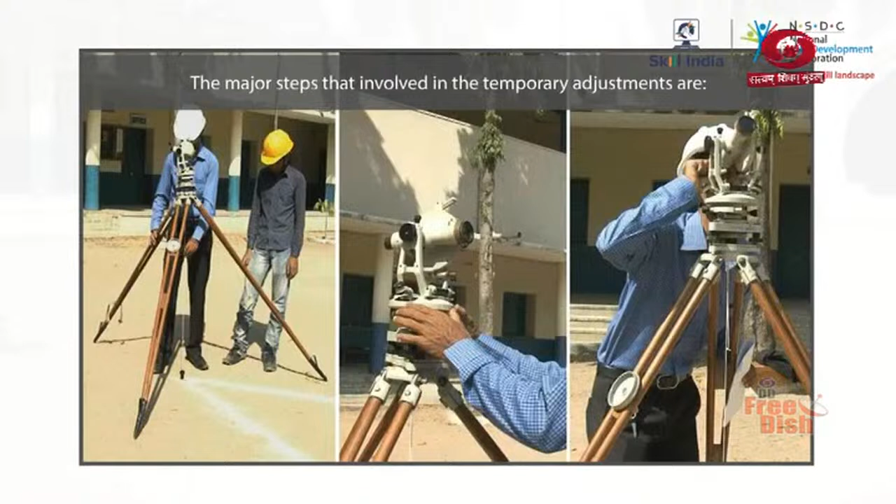Such as setting up the theodolite and centering, leveling the instrument, and elimination of parallax.

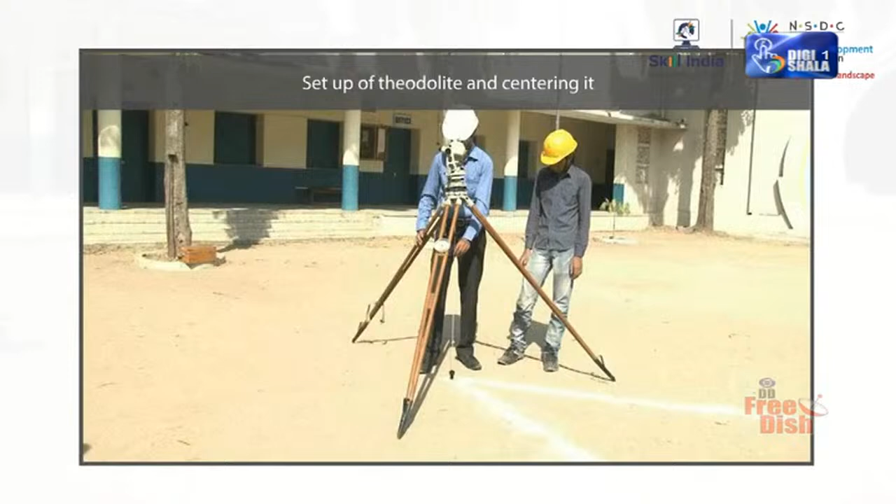Setting up and centering the theodolite means positioning the instrument exactly above the station mark. Leveling the instrument means adjusting it to an exactly vertical position. Eliminating the parallax means focusing the telescope sharply by turning the eyepiece and the focusing screw.

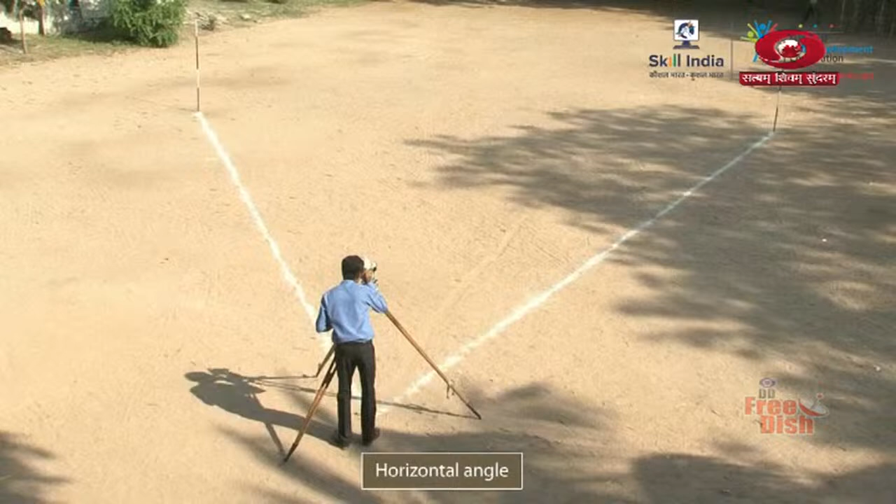A horizontal angle is an angle measured in the horizontal plane in the clockwise direction. To measure the horizontal angle with a theodolite, you must follow a few steps while handling its parts, such as the vernier on the upper plate, the lower plate, the telescope, and others. Let us find out what these steps are.

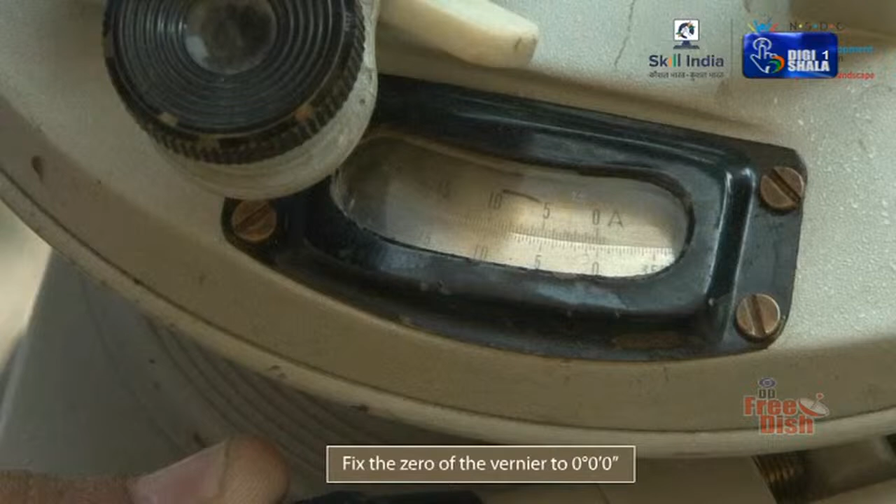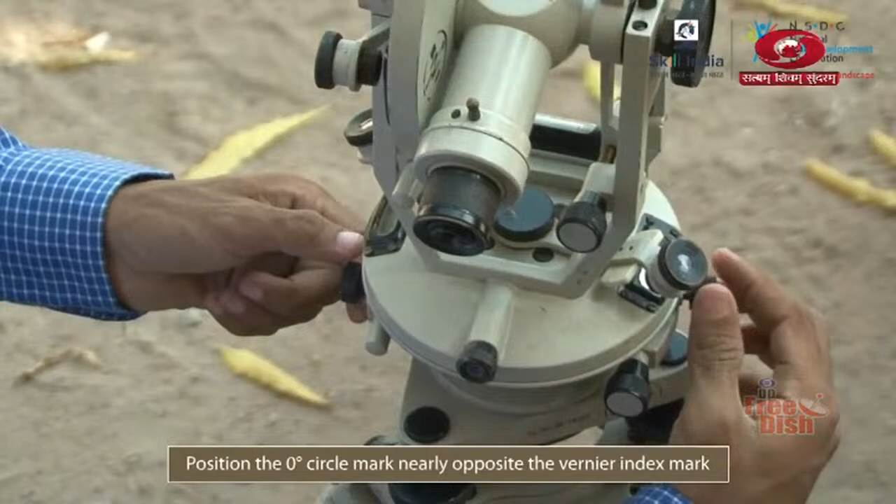To measure the horizontal angle, you must first fix the zero of the vernier in the upper plate to 0 degrees, 0 minutes, and 0 seconds of the circular scale of the lower plate. To do this, first, loosen the upper and lower clamps and position the 0 degree circle mark nearly opposite the vernier index mark.

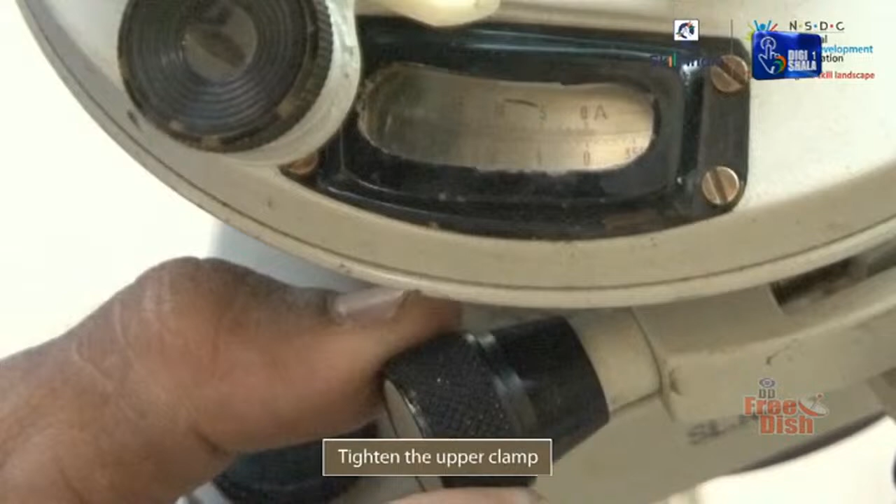Then, tighten the upper clamp. After that, use the upper tangent screw to position the 0 mark of the circle so that it is accurately aligned with the vernier index. When you tighten the upper clamp, the circle and the upper plate must be locked together and rotating as one.

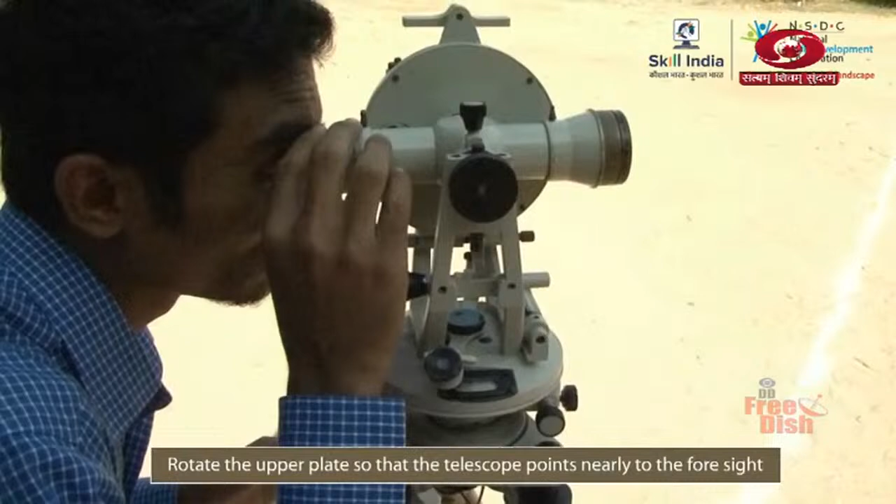Next, keeping the lower clamp loose, point the telescope to the back sight and take the vernier readings. Keeping the upper clamp loose, rotate the upper plate so that the telescope points nearly to the foresight. After that, tighten the upper clamp and focus the foresight precisely.

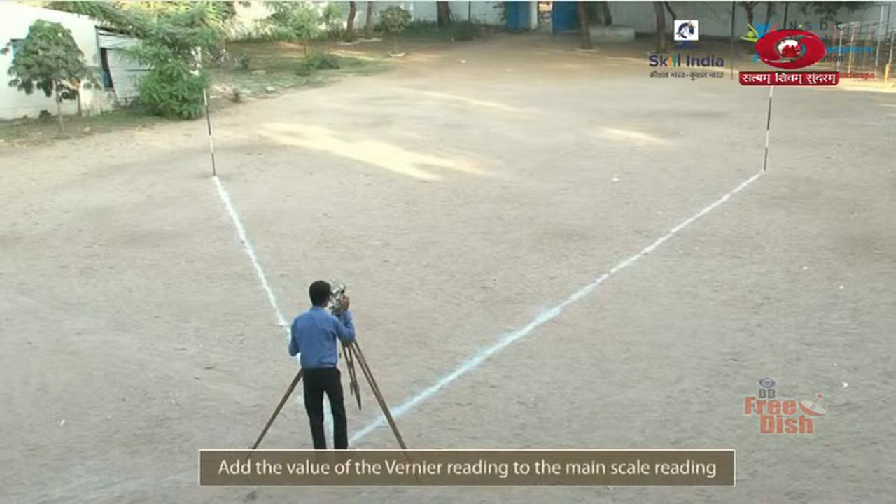Finally, add the value of the vernier reading to the main scale reading. The sum is the value of the horizontal angle. So remember, these are the steps that you must follow for taking the measurement of a horizontal angle using the theodolite.

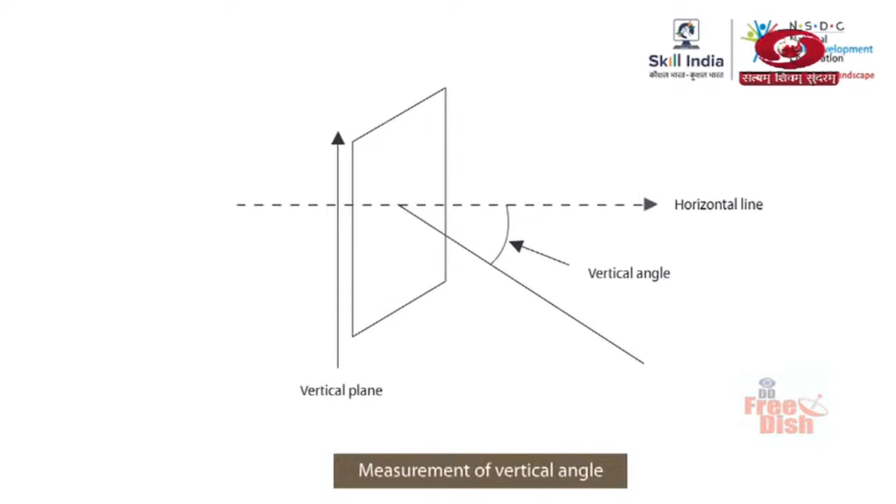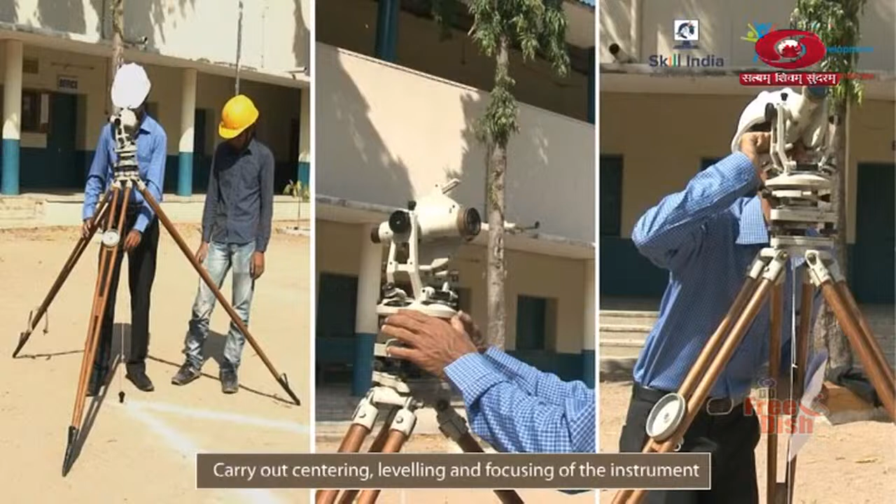A vertical angle is the angle measured upward or downward in the vertical plane from a certain point on a given horizontal line. To measure the vertical angle with the theodolite, you must follow a few steps. Let us find out what they are. First, carry out the steps for centering, leveling, and focusing the instrument.

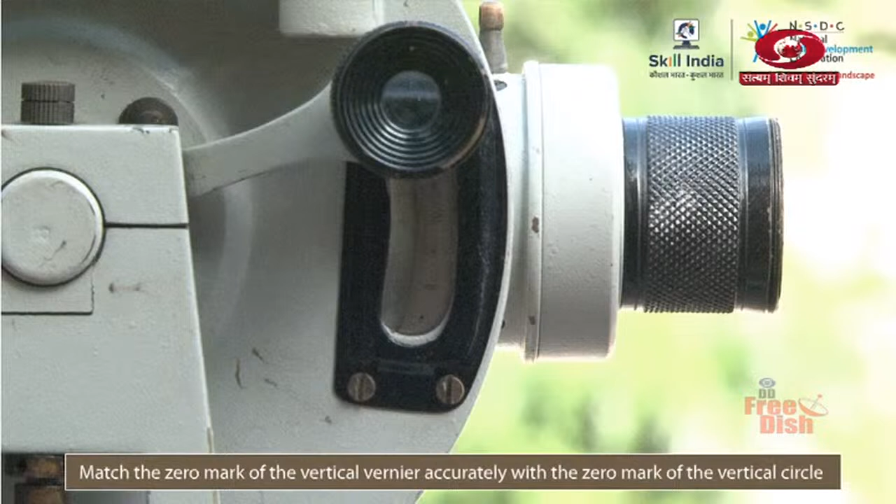Next, with the help of the vertical circle clamp and the tangent screw, match the 0 mark of the vertical vernier accurately with the 0 mark of the vertical circle. Once the bubble is leveled, loosen the vertical circle clamp and point the telescope to the object O, whose vertical angle you have to find. Then, tighten the upper and lower screws.

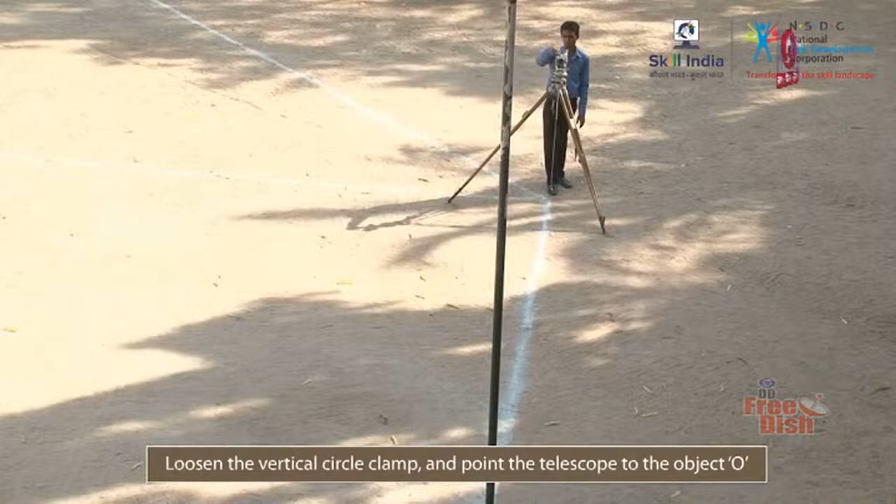Point the telescope to the bottom of O, fix the vertical circle clamp, and take reading of both the verniers. Change the face of the theodolite and take a second reading of both the verniers.

Finally, obtain the measurement of the vertical angle by making a note of the mean of the left and right face readings. So remember, these are the steps that you must follow for taking the measurement of a vertical angle using the theodolite.

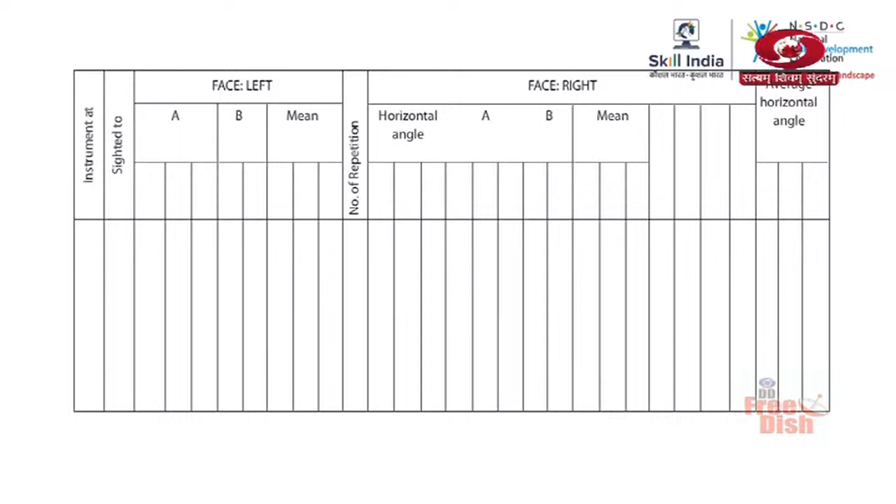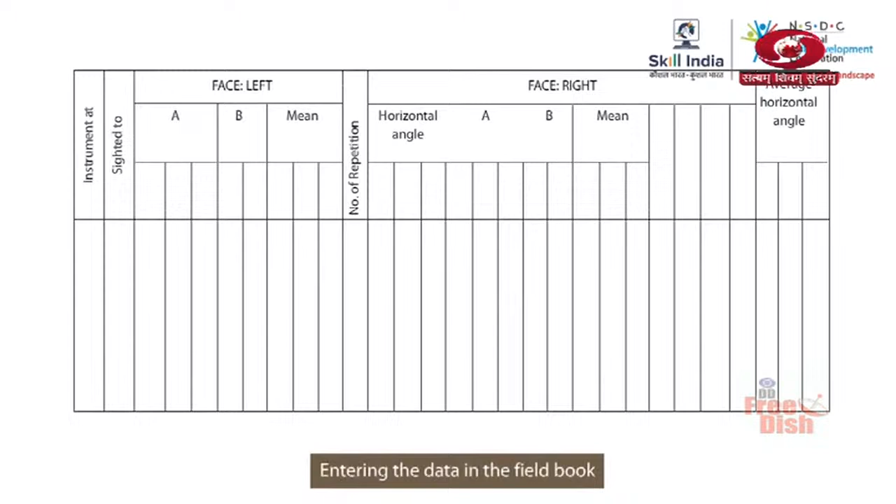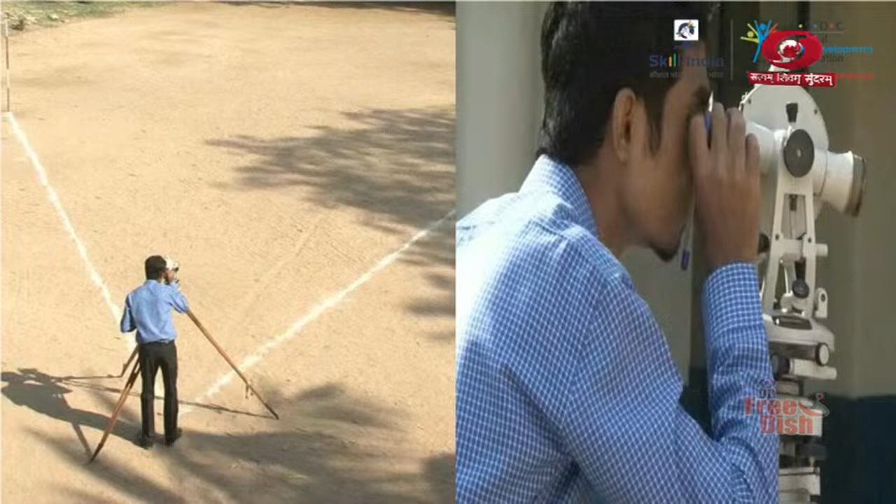In this module, you have learned to explain the measurement of horizontal and vertical angles and the adjustment of vernier scale and enter the data in the field book. You can measure the horizontal angle by following some steps while handling parts of the theodolite, such as the vernier on the upper plate, the lower plate, the telescope, and others. You can measure the vertical angle by following some steps while handling parts of the theodolite, such as the plate bubble, foot screws, telescope, and others. You can follow these formats for entering the data in the field book.

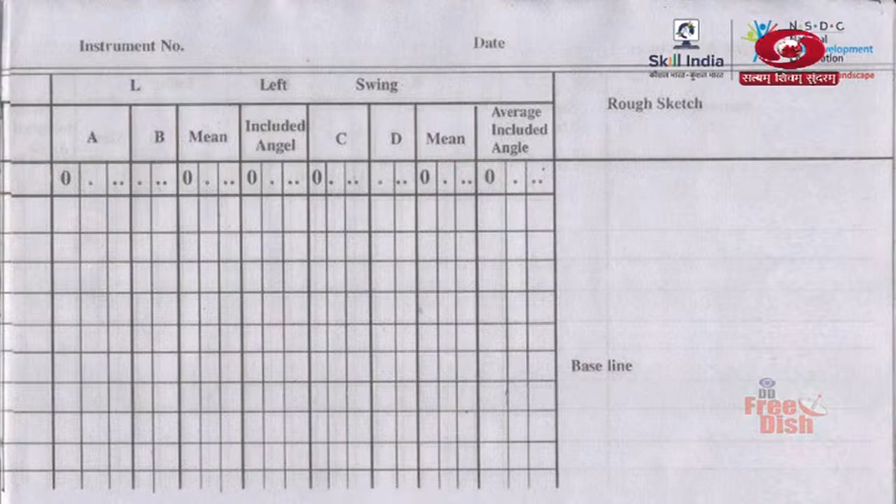You have seen how to make measurement of horizontal angles directly using the theodolite. Sometimes, though, you need to take a measurement of the horizontal angle along with very precise subdivision values of the angle. Also, you might have to take different horizontal angles from one and the same station. How can you do this? Let's find out the answer by going through this module, Measurement of Horizontal Angle.

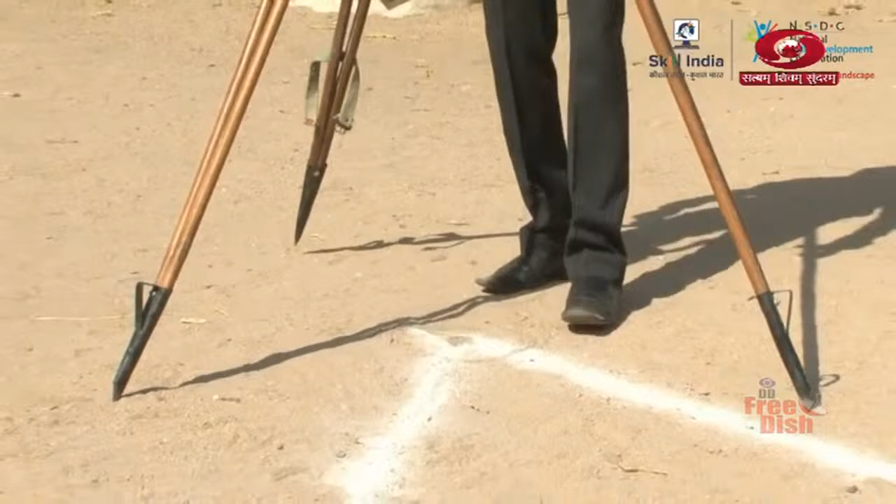And sight the primary point of the horizontal angle. Then, turn the upper fixing screw and the upper tangent screw to match the 0-0 mark of the vernier with the corresponding mark of the main scale.

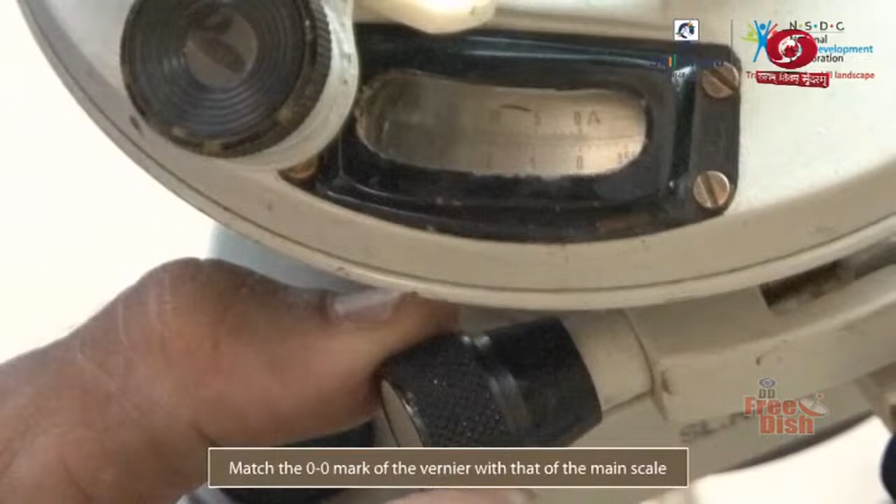Next, turn the lower screw loose to rotate the two plates as one to the secondary point of the horizontal angle. Keeping the lower clamp fixed, turn the upper fixing screw loose. Check the reading on the instrument and record the value.

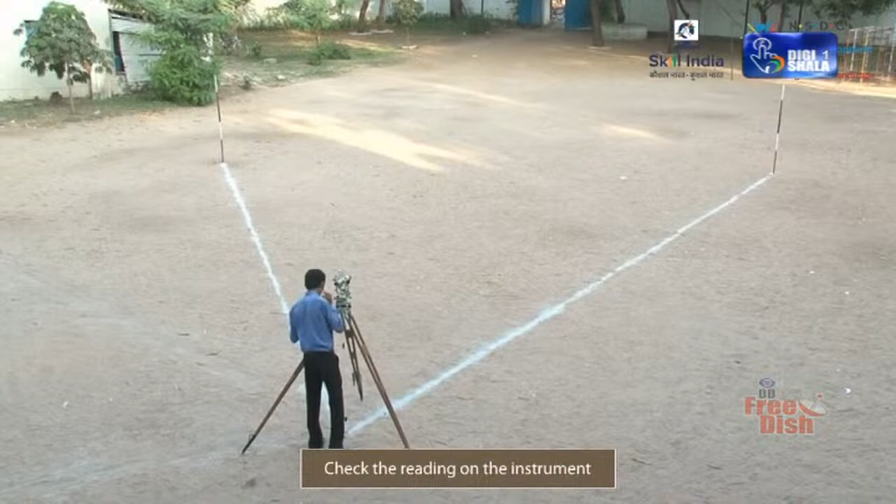Now you must begin the steps of repetition by changing the position of the telescope. So, loosen the lower clamp and transit the telescope. Keeping the angular reading fixed at the initial value, rotate the plate unit and point to backside. Turn the lower clamping screw tight. Then, use the lower tangent screw to point accurately to the backside.

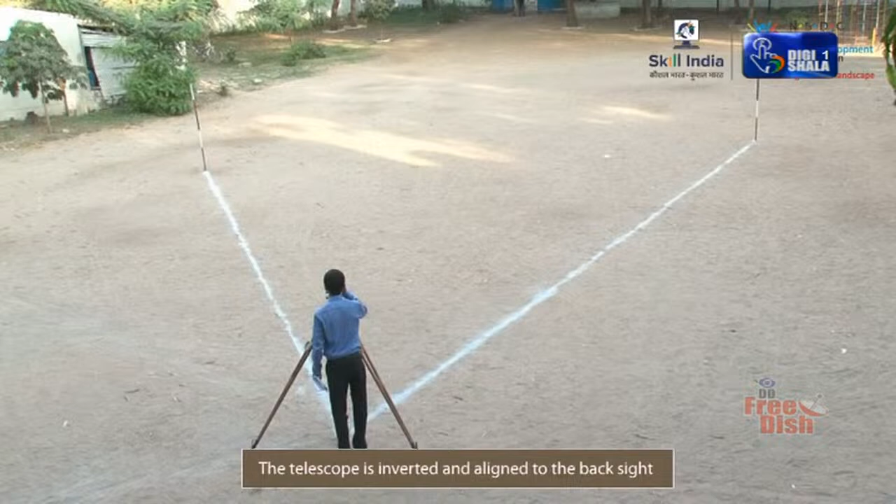Note that the telescope is inverted and aligned to the back sight. As you can see, the initial angle reading remains set on the horizontal circle. Now, turn the upper clamp loose, rotate the upper plate and point at foresight. Finally, turn the upper clamp tight and use the upper tangent screw to complete foresight pointing.

The vernier reading shows the angular measurement as equal to the sum of the first and the second angle. Divide this sum by 2, that is, the number of repetitions, to find the average value of the angle. Note that you can get a precise reading of the angle by this method. So, remember, these are the steps in measuring the horizontal angle by the method of repetition.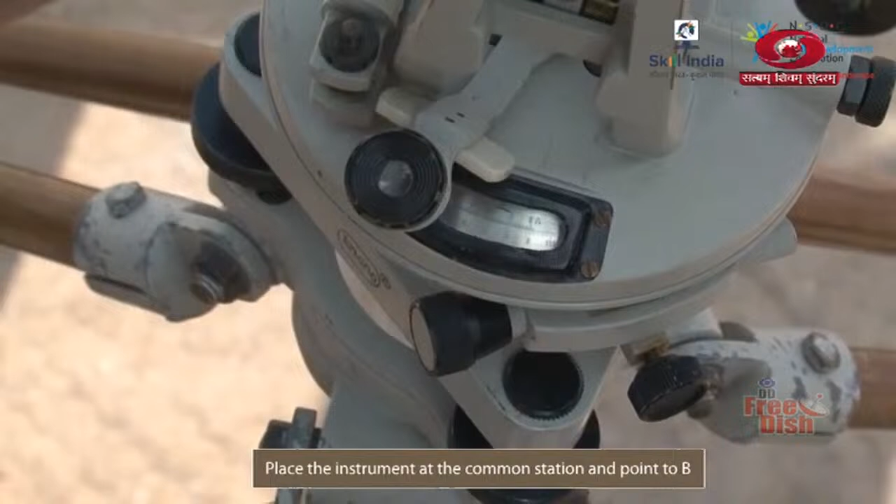The reiteration method for measurement of horizontal angle is followed when several horizontal angles must be measured from the same station. Let's take a look at the steps to be followed in this method. First, place the instrument at the common station and point to the first station B. Keeping the reading of one vernier as 0, 0, make a note of the reading of the other vernier.

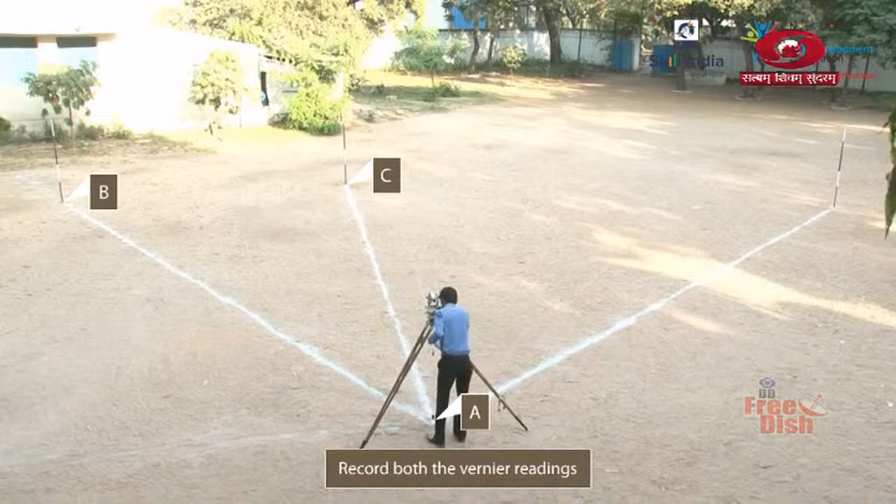Then, with the instrument in the face left position, turn the telescope clockwise to side C. Then, clamp the upper fixing screw and bring the crosshair into coincidence. Record both the vernier readings. Note that their mean gives you angle BAC.

Turn the upper clamping screw loose and rotate the instrument to D. Calculate the mean of the vernier readings again to obtain the angle BAD. Subtract angle BAC from angle BAD to get angle CAD. So, remember, this is the method to be followed for measurement of horizontal angle by reiteration method.

You have just seen how to measure horizontal angle by the repetition and reiteration methods. Now, let us take a quick look at how to enter the data in the field book. This is the field book format for entering data relating to the measurement of horizontal angle by repetition method.

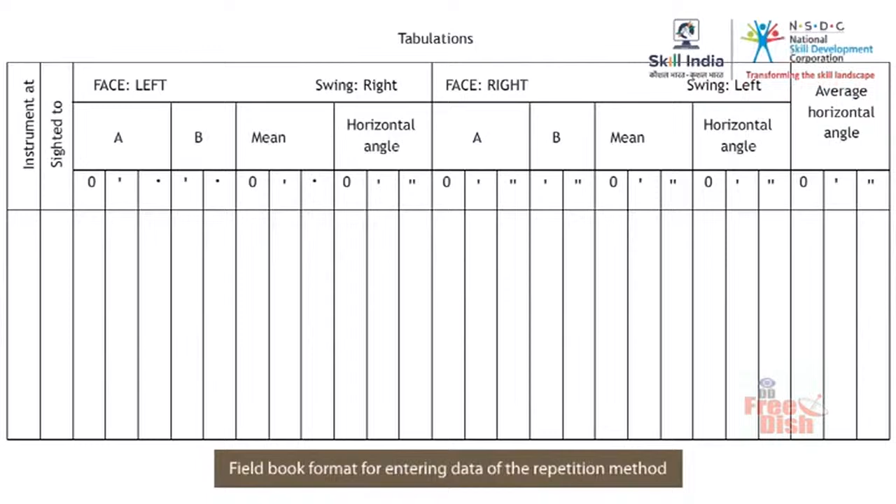And in this module, you have learnt to measure horizontal angles by the reiteration and repetition method and to enter data in the field book. These are the steps to measure the horizontal angle by the repetition method. These are the steps to measure the horizontal angle by the reiteration method. You can follow these formats for entering horizontal angle.

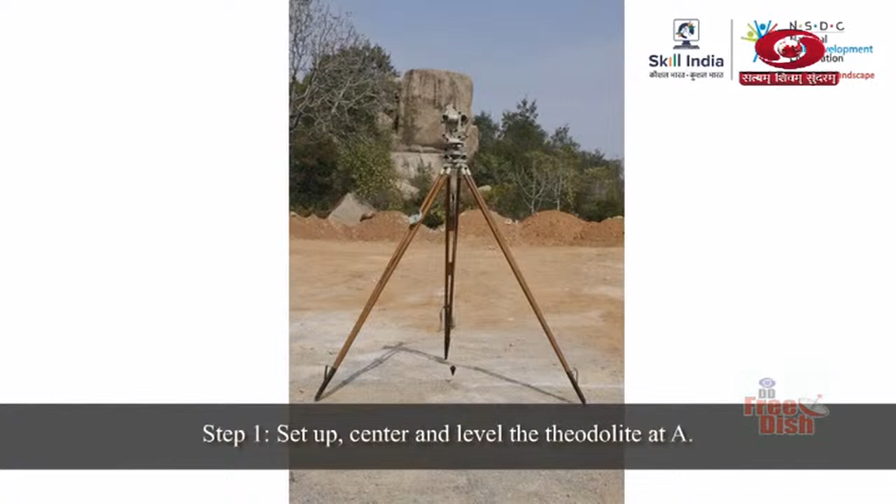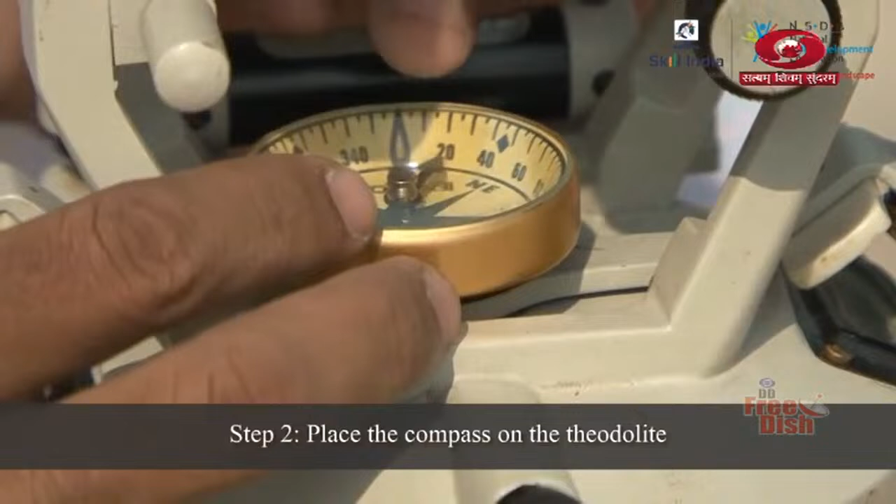To measure the magnetic bearing, first set up, center, and level the theodolite at A. Place the compass on the theodolite. Rotate the telescope by loosening the lower clamp until the needle coincides with 0, 0. It indicates that the telescope is perfectly oriented along the magnetic meridian.

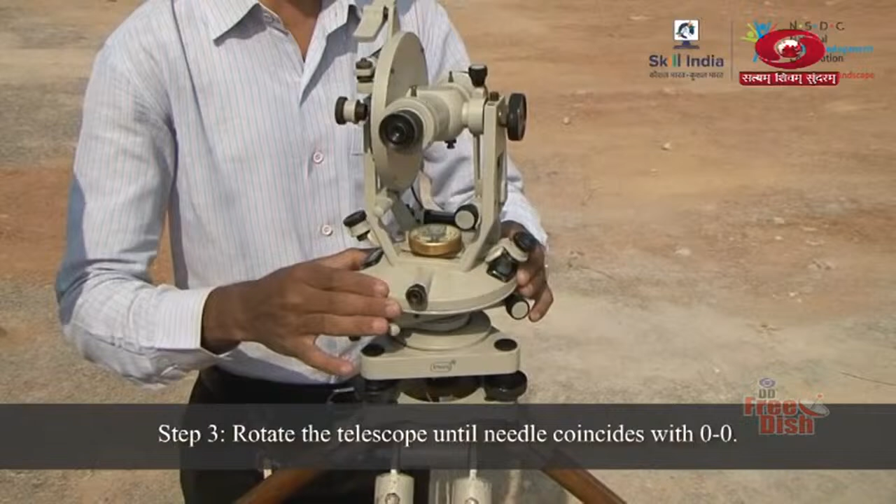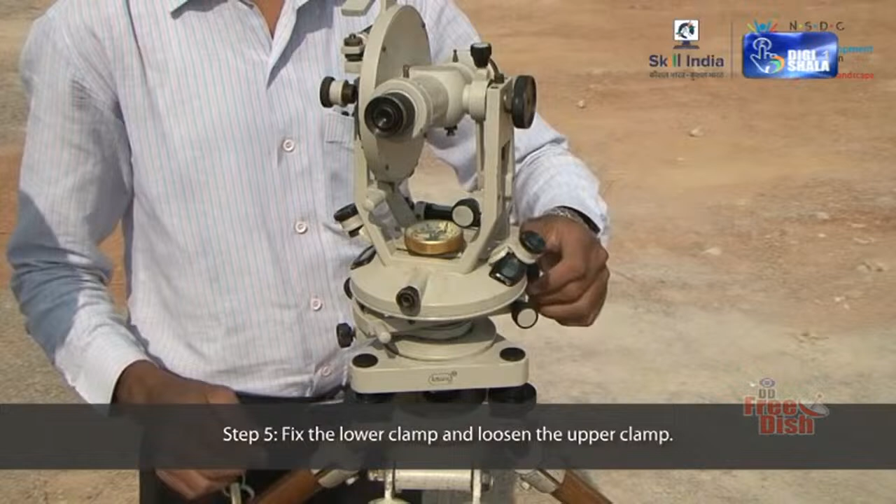Set the vernier at A and B to angles 0 and 180 degrees respectively. Fix the lower clamp and loosen the upper clamp. Turn the telescope clockwise to bisect the ranging rod at B with the help of an upper tangent screw. Take the readings from both the verniers.

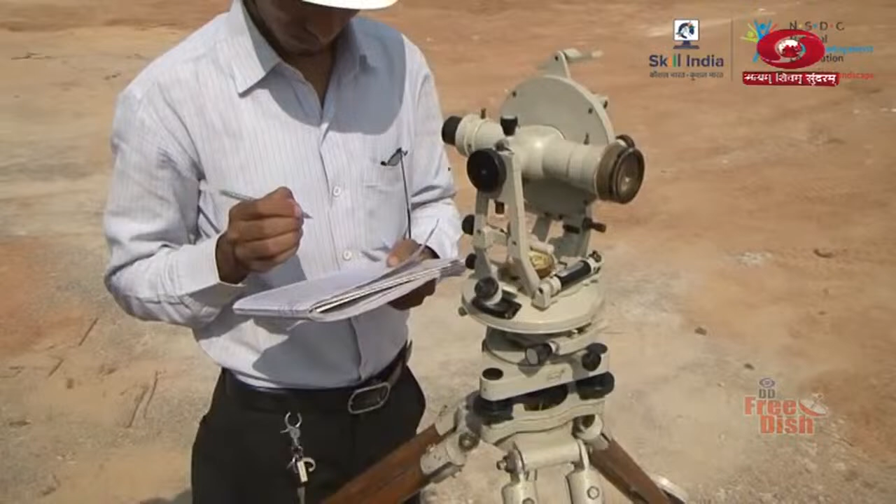Calculate the mean of the two vernier readings, which is known as the magnetic bearing of line AB. So remember, these are the steps you must follow in order to determine the magnetic bearing.

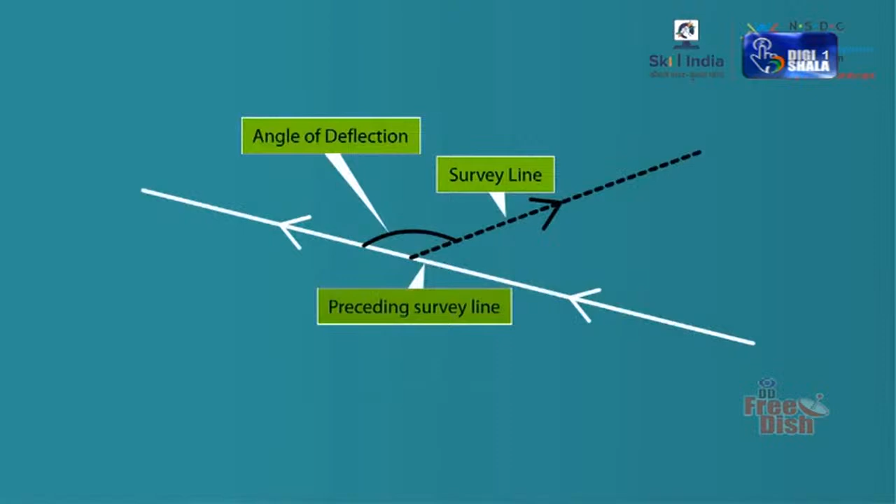Deflection angle refers to the angle by which a line is deflected from its original direction. In other words, it refers to the angle that a survey line makes with the extension of the preceding line. Deflection may be towards the right or left, depending upon the measurement of the angle in the clockwise or anti-clockwise direction from the extension of the preceding line.

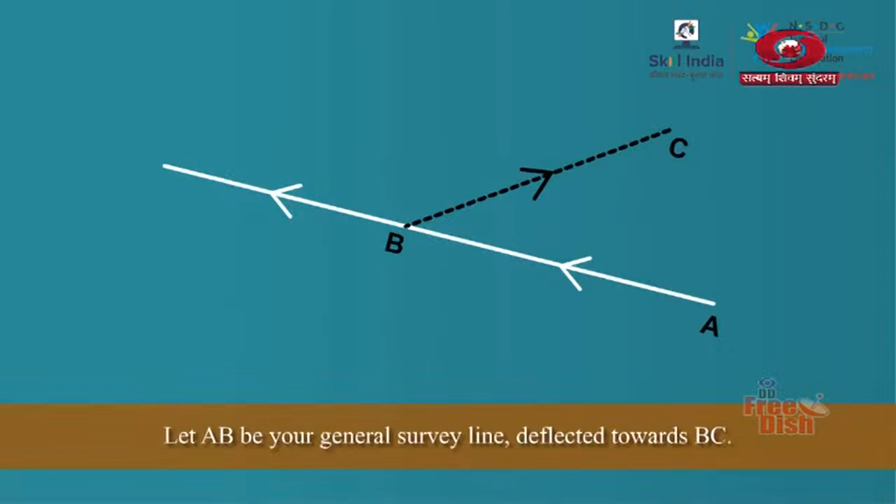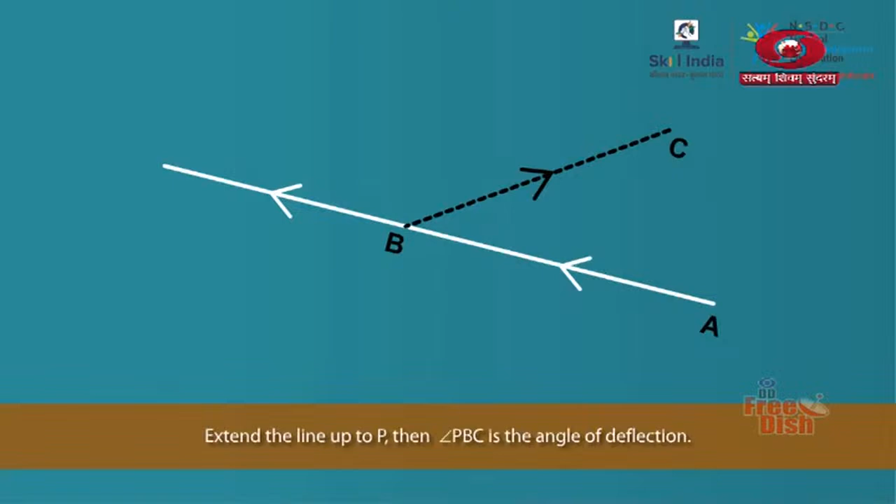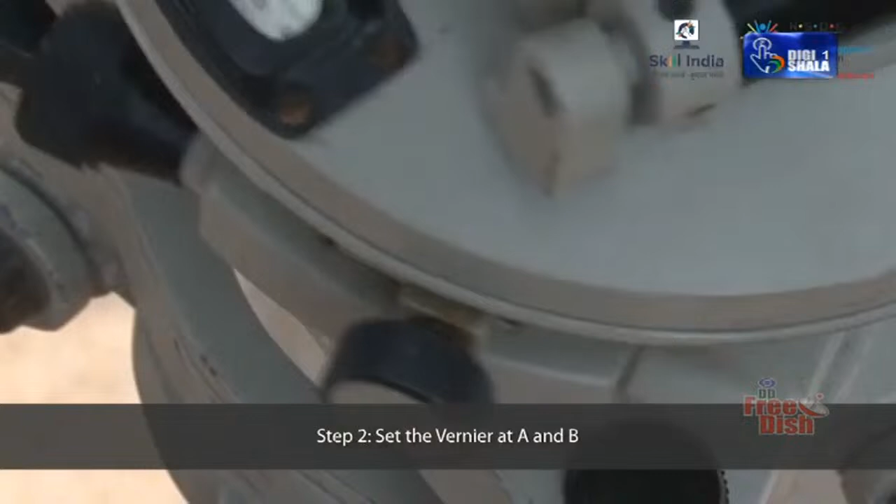Let us say AB is your general survey line, which is deflected towards BC. With AB extended up to P, the angle PBC is termed as angle of deflection. To measure the deflection angle, first set up, center, and level the theodolite at B. Set the vernier at A and B to angles 0 and 180 degrees respectively.

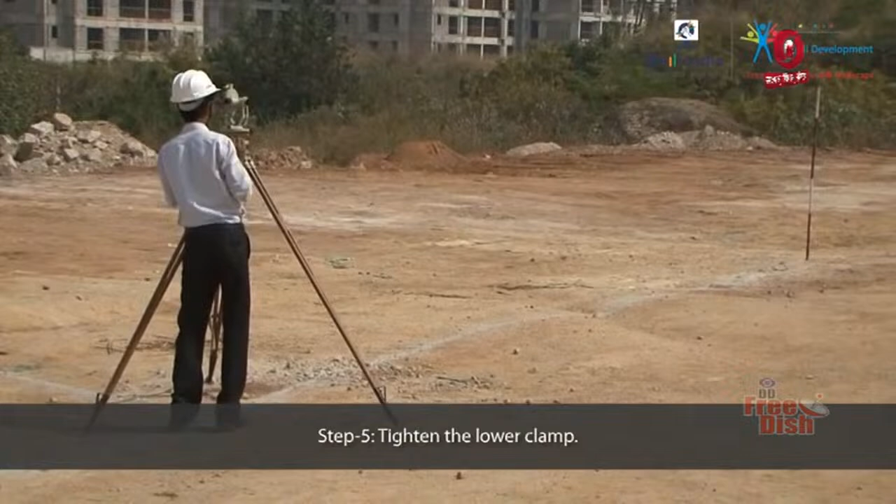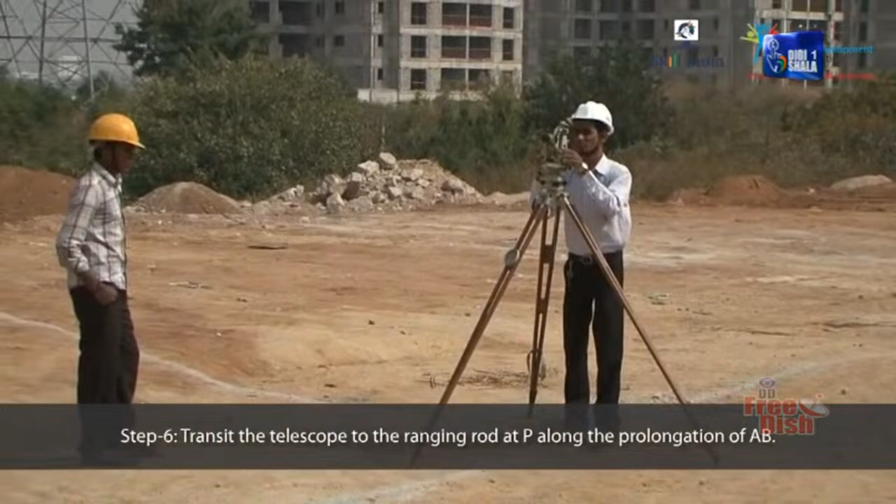Turn the telescope to bisect the ranging rod at A. Tighten the lower clamp. Transit the telescope to the ranging rod at P along the prolongation of AB. Loosen the upper clamp and turn the telescope clockwise to bisect the ranging rod at C.

Take the readings on both the verniers and tighten the upper clamp. Calculate the deflection angle from the vernier readings. So remember, this is the procedure for measuring the deflection angle, angle PBC.

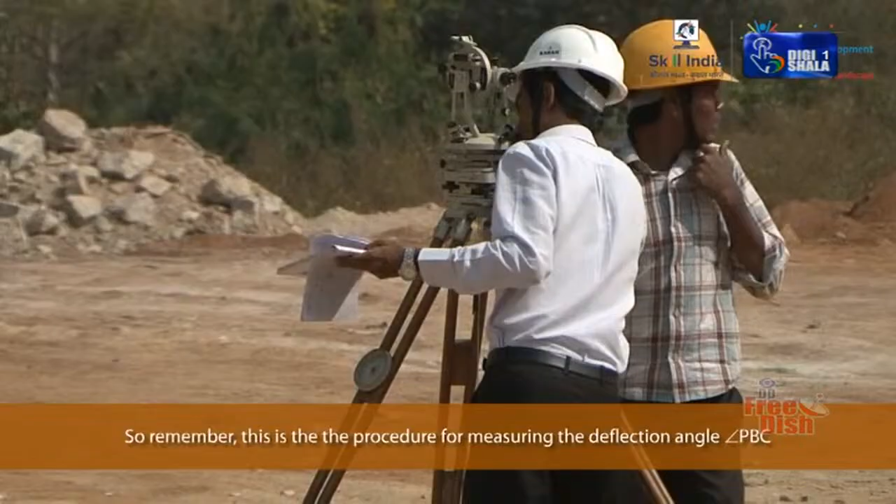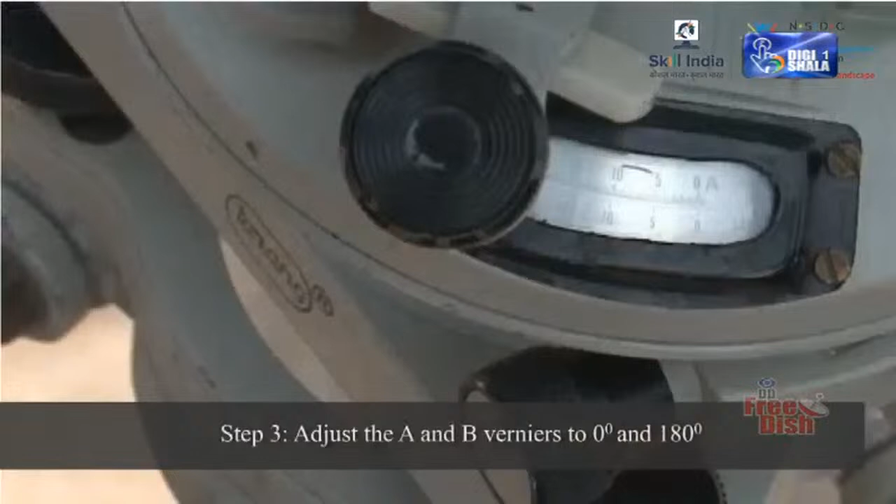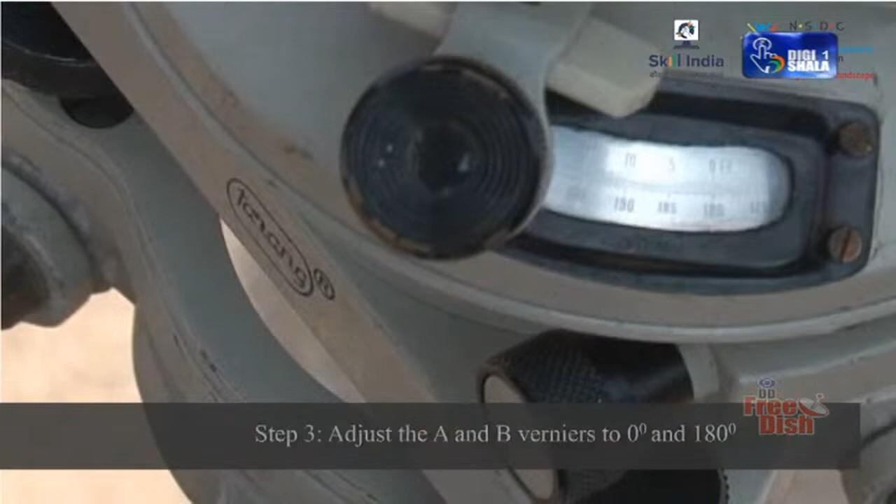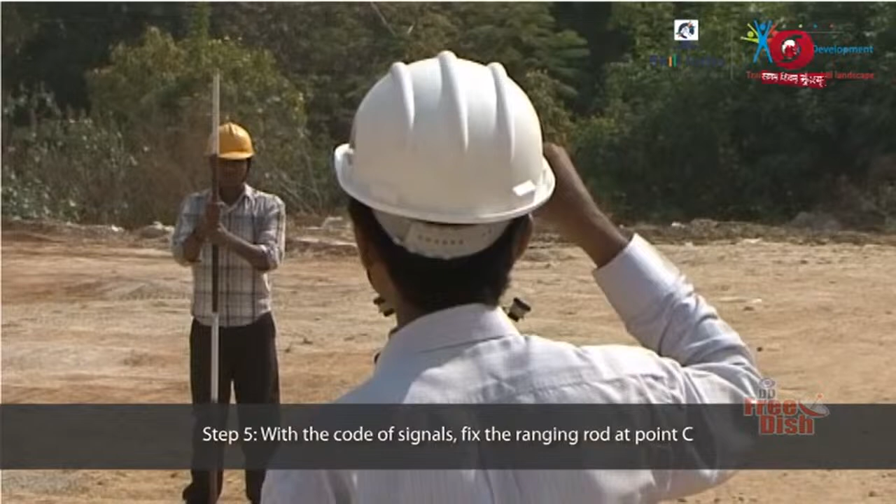To prolong the straight line, first set up, center, and level the theodolite at B. Direct the telescope towards ranging rod A and bisect it perfectly. Adjust the A and B verniers so that their readings are 0 and 180 degrees respectively. Loosen the upper clamp and transit the telescope by 180 degrees. With the help of a code of signals, fix the ranging rod at point C. So remember, this is the procedure for prolongation of the straight line AB to D.

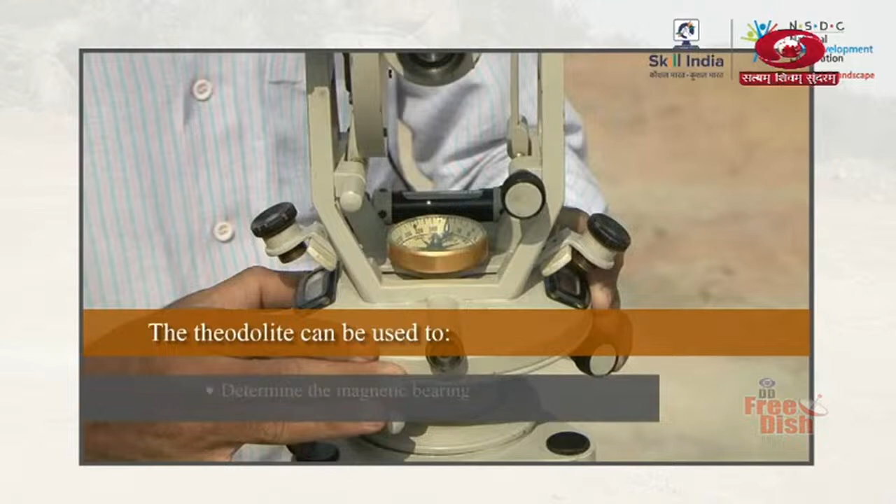In this module, you have seen what the uses of the theodolite are. The theodolite can be used to determine the magnetic bearing, determine the deflection angle, and perform the prolongation of a straight line. This is the procedure for measuring the magnetic bearing of line AB. This is the procedure for measuring the deflection angle, angle PBC. This is the procedure for prolongation of the straight line AB to D.

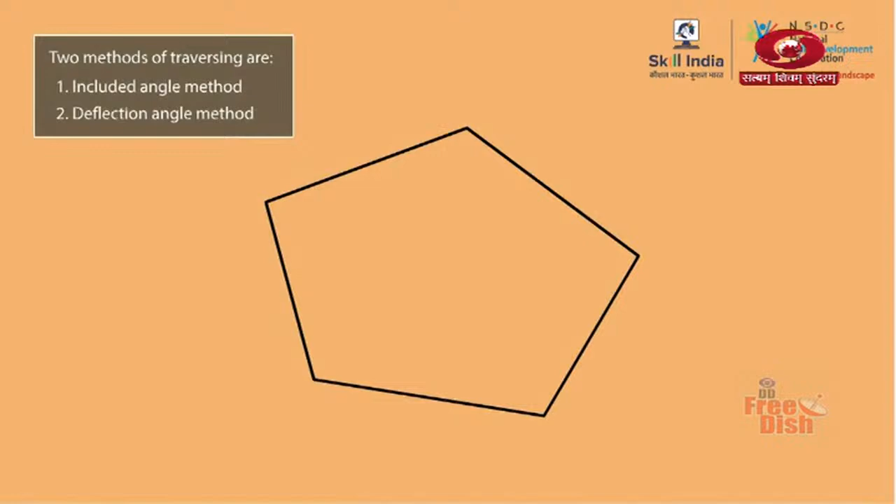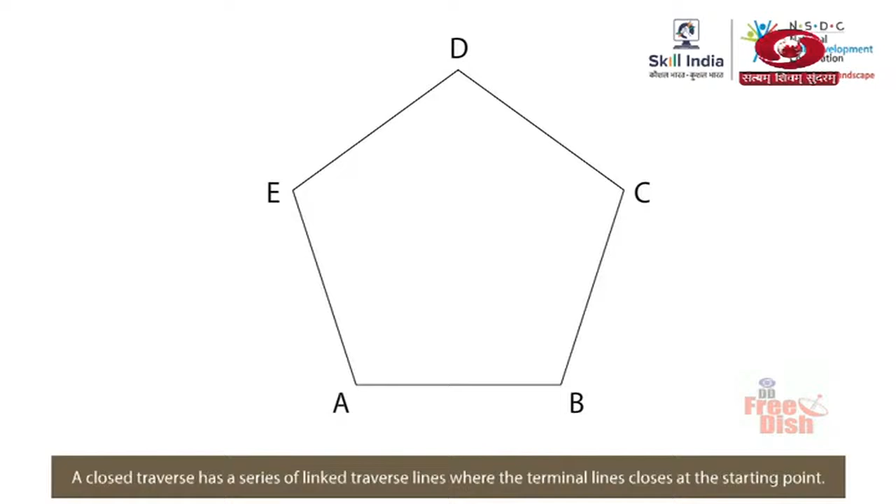Traverse is a method in the field of surveying to establish control networks. Two methods of traversing are: 1. Included angle method. 2. Deflection angle method. Included angle method of traversing is employed for a closed traverse. A closed traverse has a series of linked traverse lines where the terminal line closes at the starting point. A polygon is an example of closed traverse.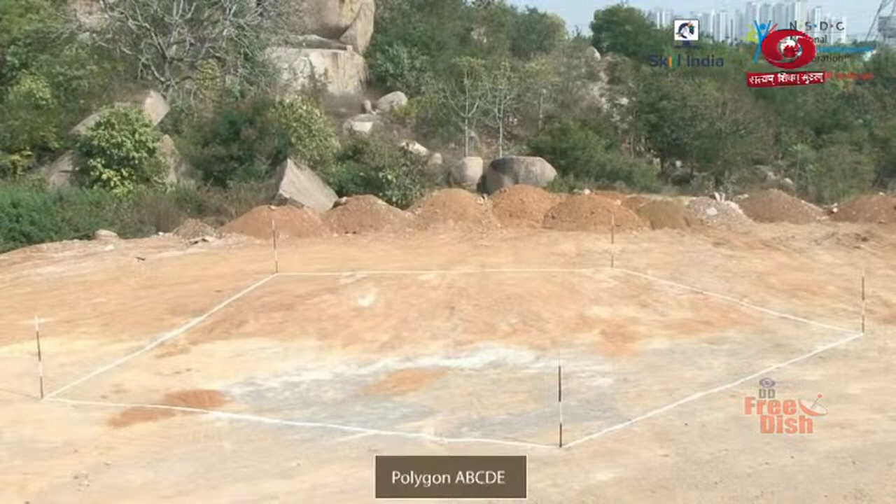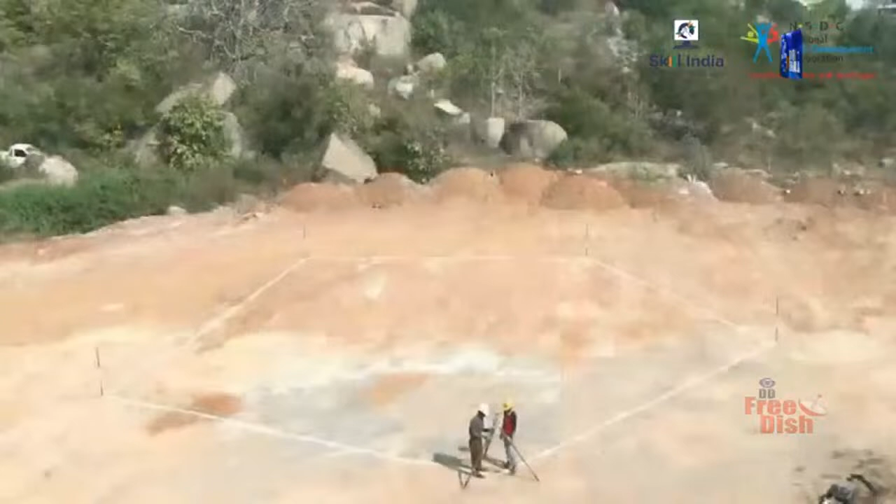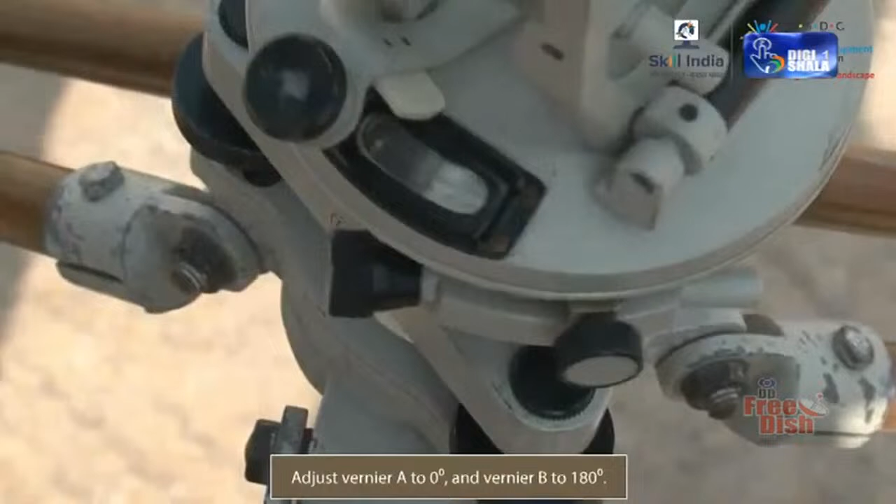Let us see how to perform traversing by included angle method. Consider a closed traverse in the form of this polygon ABCDE. Set up the theodolite at point A and center it. Adjust the vernier A to 0 degrees and the vernier B to 180 degrees respectively. Orient the telescope along the north line with the help of a compass.

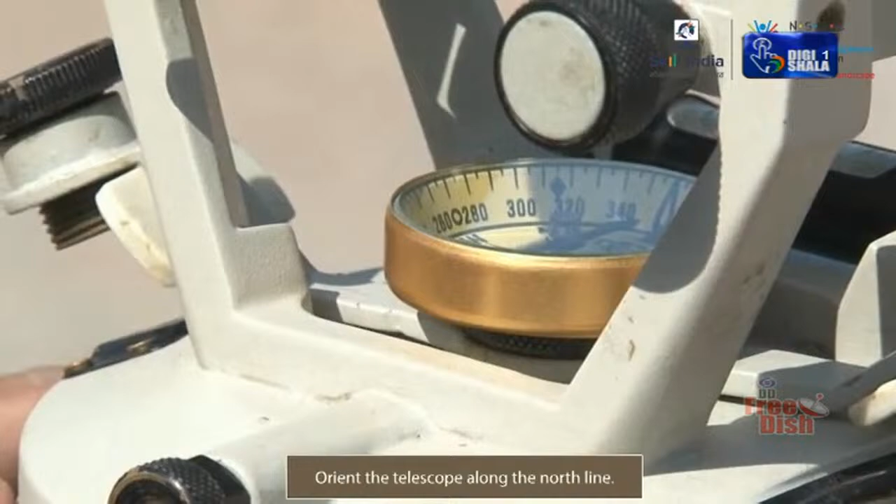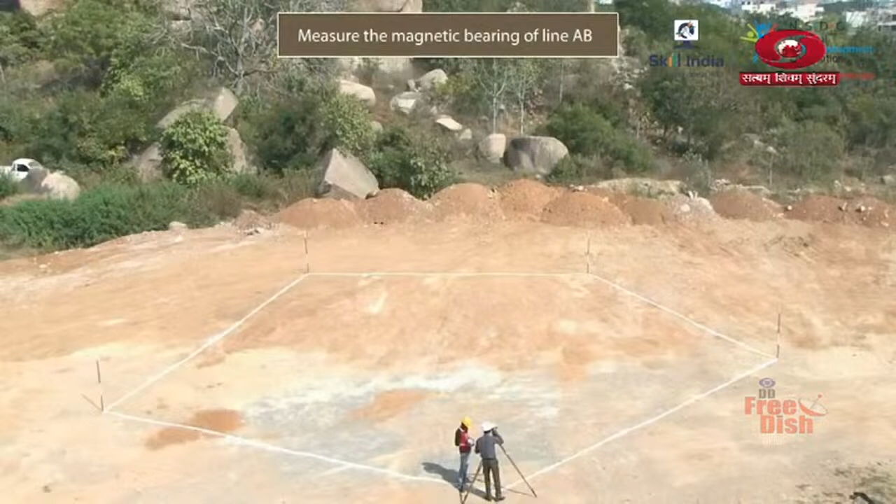Then measure the magnetic bearing of line AB. Now, once again set the vernier to 0 degrees and fix the upper clamp. To measure the angle at A, bisect the ranging rod at E by loosening the lower clamp. Then, tighten the lower clamp and open the upper clamp.

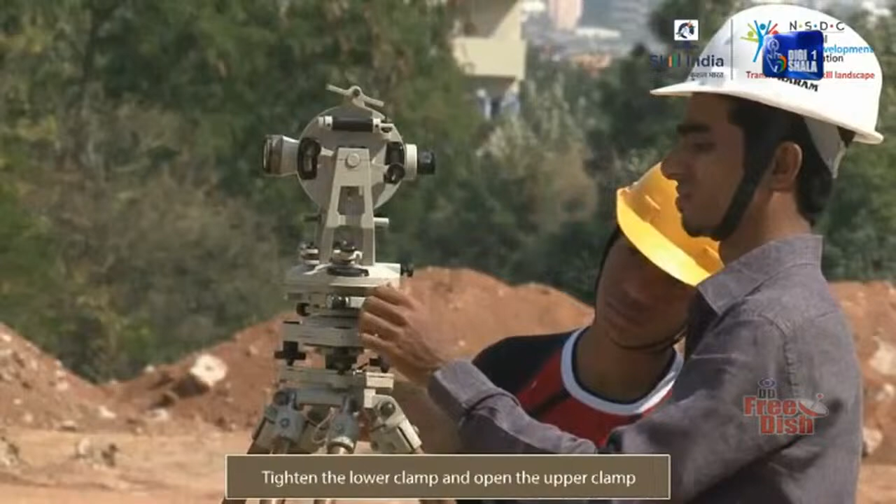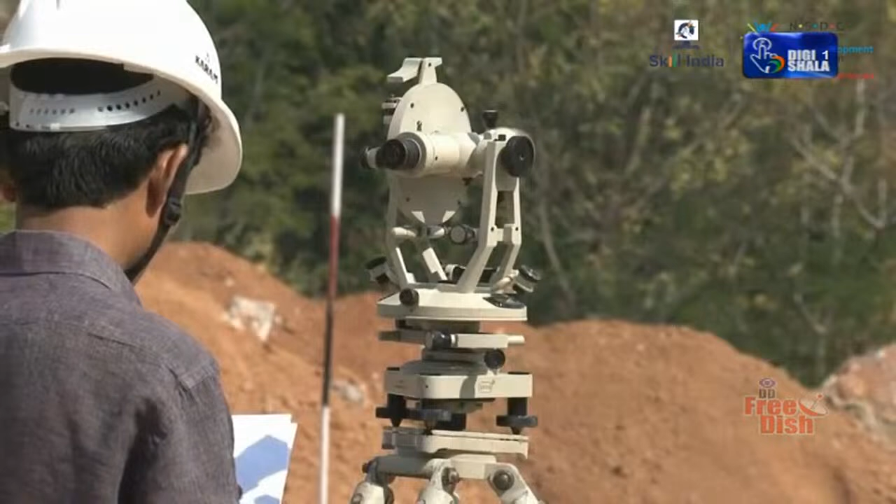Turn the telescope in the clockwise direction to bisect the ranging rod at B. Now, angle A is measured by noting the readings of the verniers. Similarly, the rest of the angles of the polygon ABCDE are measured by centering the theodolite at the points B, C, D, and E of the traverse.

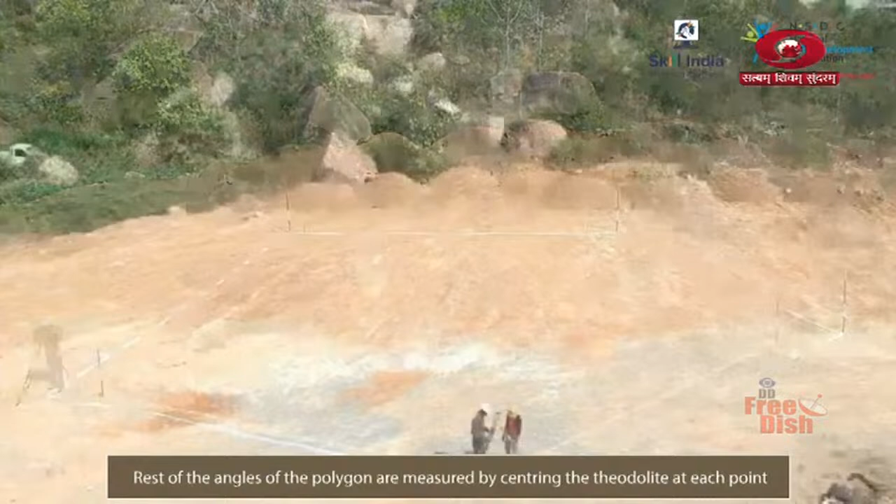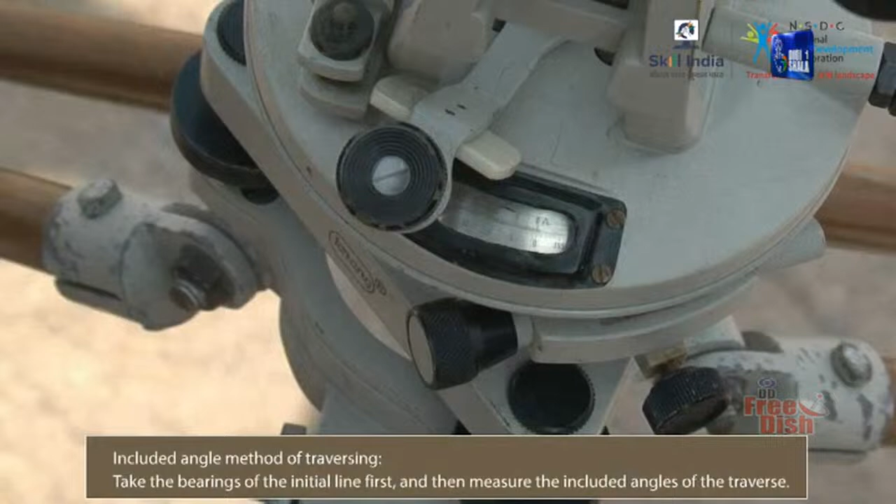Finally, an arithmetic check is applied on the measured angles using the formula: (2n minus 4) multiplied by 90 degrees, which equals the sum of interior angles. So remember, the included angle method of traversing is done by taking the bearing of the initial line first and then measuring the included angles of the traverse.